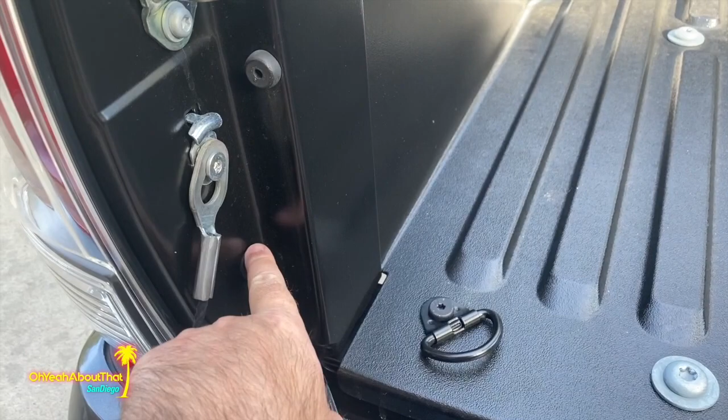So let's bust out the 10mm and get these old ones off. All right, these factory lights are held in by just a couple 10s. One there, and I think it's this bottom one. This one, I don't believe you have to remove. And then the light just pulls right out.

Unplug everything. Now, I will be sacrificing my really, really good Lasfit reverse LEDs, but the new lights have built-in LEDs. However, I suspect they probably won't be as good as the Lasfit, but we'll find out.

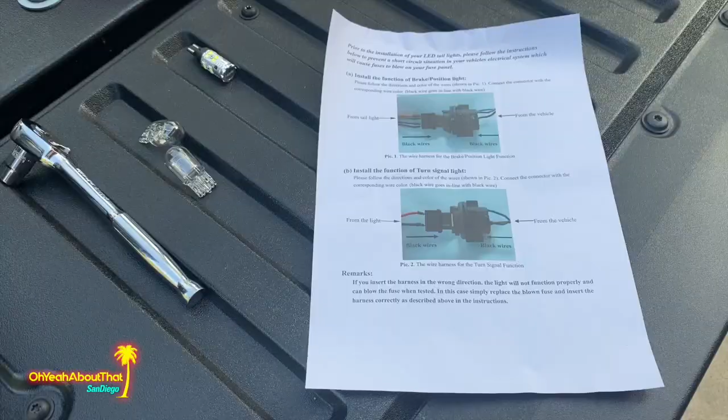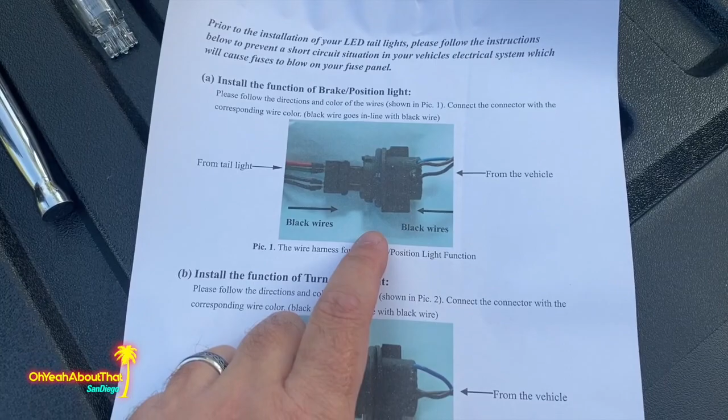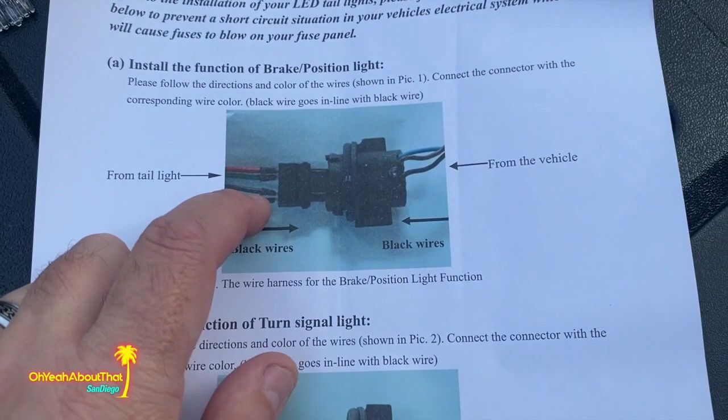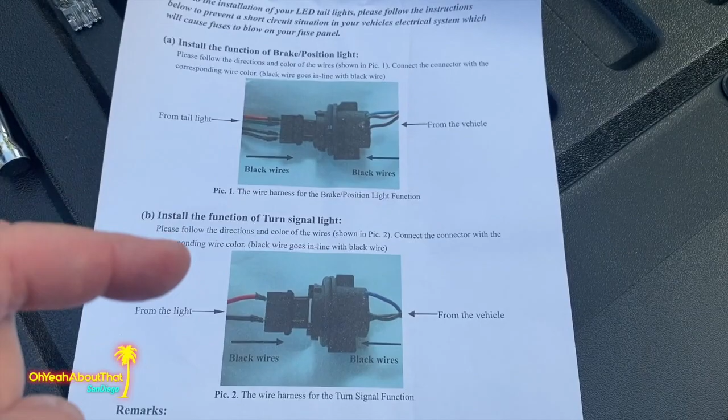One thing I wanted to point out, my truck is a 2020, and they may have changed the wiring for 20 because the coloring is different. This is coming from the light, and it's got the black, I'm assuming the ground at the bottom, and the factory one does not have a solid black. It has a wire with a black stripe, and that is the case for the brake lights, the parking lights, and also the reverse lights. So that's the order I plugged it in.

Just did a quick temporary fit, turned on the parking lights, and at least they're working. That looks so much better, but I need to go ahead and remove this and plug everything in properly, secure it, and then bolt it into place. And I'll do a comparison between the old one and the new one.

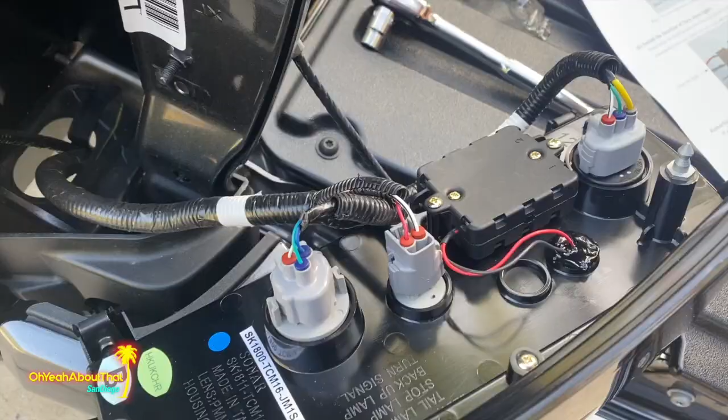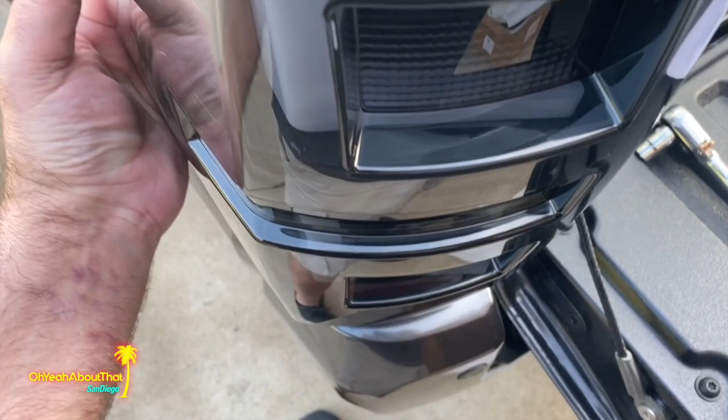Very simple. I've got the new ones kind of installed where they screw in where the old bulbs used to screw in. The only difference is the reverse light is now in the middle where it used to be at the bottom before. So everything is secured. I can go ahead and snap this in place and then secure it. There's a comparison, driver's side versus passenger side.

All right, time to get the other side done and finish this up. Then I'll show you what everything looks like. Stay tuned. All right, the lights are in, and in my opinion, it's 1 billion times better.

I think they look really good with the color of the truck. I happen to like this particular design a lot. I know there's a lot of other LED taillights out there on the market, but this one, I just kept coming back to this one. So I guess now we'll wait till it gets dark and I'll show you the full features.

Okay, it's almost dark. I wanted to show you what the parking lights look like at night. I love them. I think they're awesome. Now we'll show you the brake lights.

There's the four ways, their turn signals. And there's the reverse lights. They're actually pretty bright. Pretty happy with them.